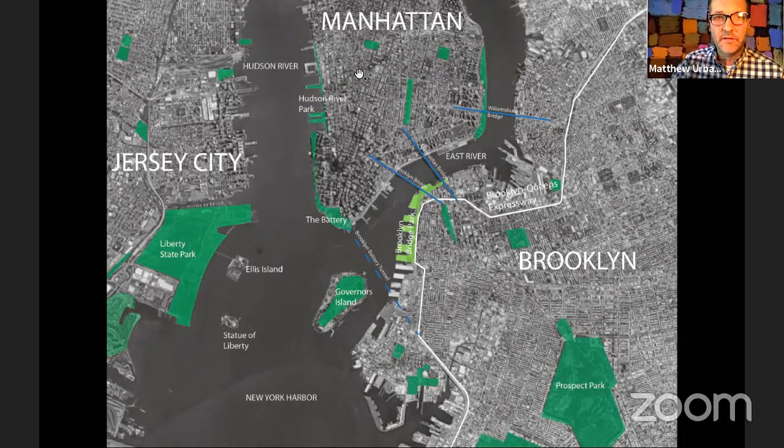Okay, so onward. For people who aren't familiar with the New York area, I probably should have zoomed out even further for context, but you probably recognize Manhattan and Brooklyn here. We can see the East River coming down through here, the Hudson River coming through here, the East River coming in here. We've got the Statue of Liberty here. We have the Brooklyn Bridge crossing here, and the Manhattan Bridge, made a little while later, crossing right there. That will help situate where we are, which is the light green—a waterfront edge park with great views of lower Manhattan and deep into the harbor and to the Statue of Liberty, with its namesake bridge crossing over it.

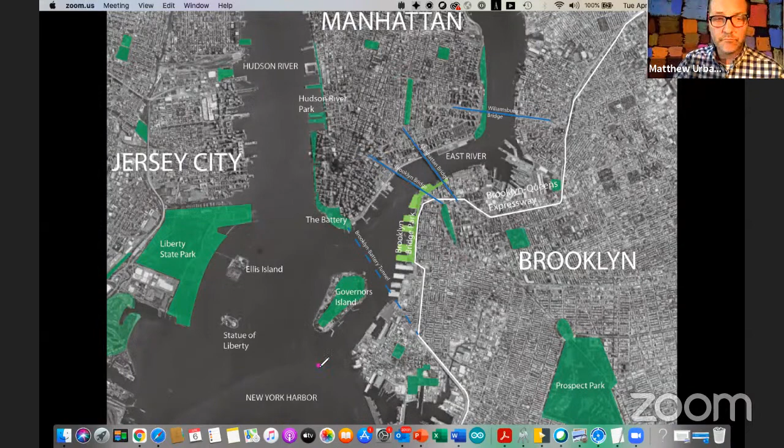Gosh, I gotta figure out how to get this in.

Also defining it against the back edge there, that tiered structure you see is called the Brooklyn Queens Expressway, or the BQE, and that's a kind of tiered highway which was made in a really cutting edge way at the time when it was made.

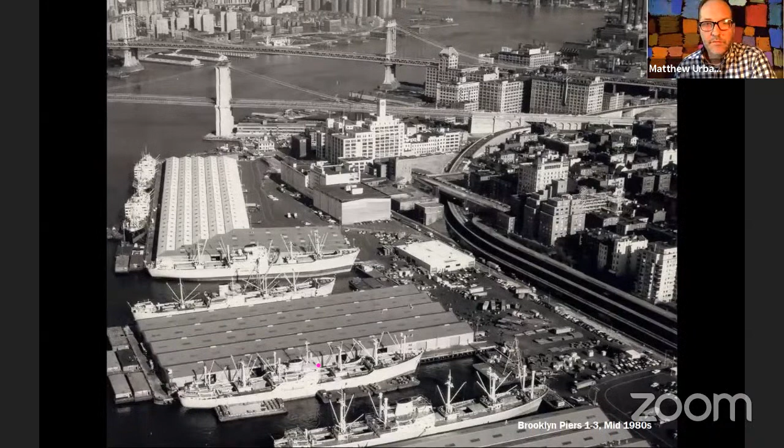A little bit earlier, the very end of the shipping that was happening on the site here, this is something called break bulk shipping. Basically, the boats have the cranes on them and everything is loose. It's sort of like if you've ever seen the movie On the Waterfront, the kind of very dangerous job of unloading these ships and swinging packages off or swinging them on, and they would hand pack them into the hulls.

And there was a lot of graft and corruption because nothing was really secured. It was tough work because there would be too much work and then no work for months. It really drove the whole economy, the whole manufacturing economy of New York at the time, though. But watch On the Waterfront. I always found it so unnerving as a kid that I couldn't even stand it at times. But anyway, it's a great movie.

So the funny thing, the irony here, was what they did with this waterfront is they made these big wide piers with sheds on them for storage. What they did is they made a kind of cutting edge break bulk shipping terminal, which is crazy. It's sort of like a cutting edge steam powered car or something like that. It was sort of like they really spent a lot of money on the old technology.

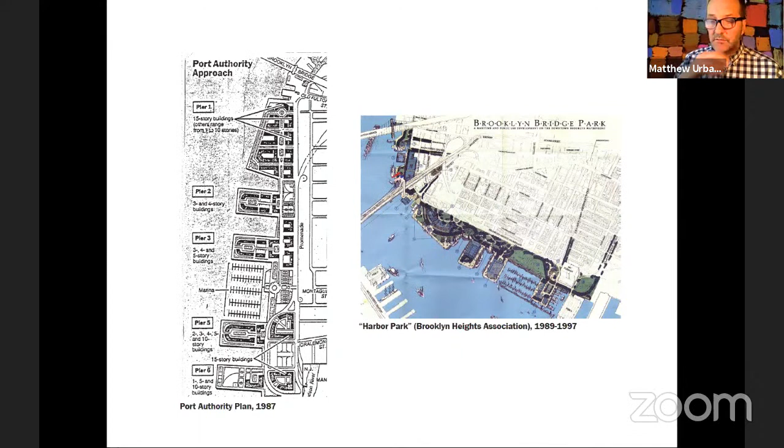To develop a plan that would be largely a park, but would plan on using 20% of the area to dedicate towards some kind of revenue generating use that would then be used to support the operations and maintenance of the park. So it would officially become a park, but it wouldn't be on the maintenance rolls, and it wouldn't drain money out of other parks.

This is a really important thing because it allows this park ultimately to be developed in such a way that it's not always a political football being played against the other parks in terms of the money being divided up for maintenance and things like that.

I came to appreciate the wisdom of this more and more as I've worked in more circumstances where people want to make extraordinary parks. If you say you want to make an extraordinary park, savvy people will understand that might mean it will drain money from other parks. So that's a very smart thing that they did, to figure out a way to pay for it independently.

So we worked on an early plan with a whole team of people that was really driven by financial planners to help solidify that idea.

In 2003, we won the competition, and we were very much a sub-consultant on that first plan. Then we won this massive contract that was absolutely remarkable. It was written by one of the guys in the ESDC at the Brooklyn Bridge Park Development Corporation, and it basically said that we were to master plan a park.

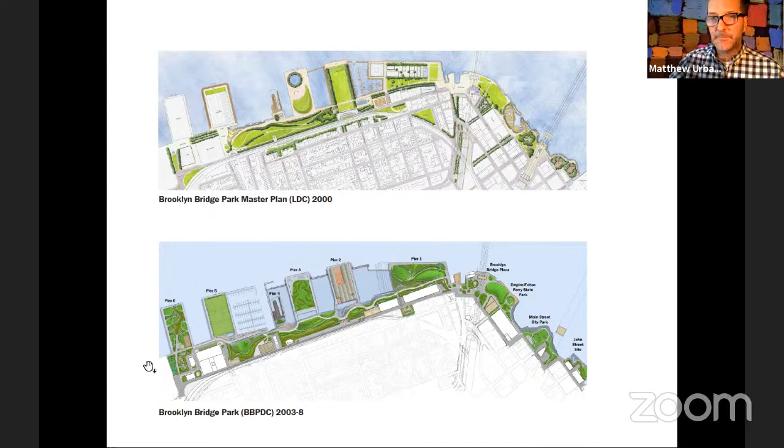We were to master plan a park within an urban plan that we were also to master plan. Within that urban plan, we were to identify revenue generating sites and uses, develop a design, calculate the cost of annual maintenance, and balance revenue generation with maintenance costs. Then we were to present it all back to them in public, which we did. You could imagine there would be a few issues with that, but it was great. It was worth it.

One of the challenges we had, if you learn about public park making and restoring in New York City, you'll learn about the Central Park Conservancy, which was put together to rescue Central Park, then in complete ruin—bare dirt, broken glass, a mess by the late 70s. They started in 1980, and by 1986 Betsy Barlow Rogers, who was running the Conservancy, had already written a book on it.

But no one really understood what it meant to make a big park in New York, or the possibility of landscape. So we did a lot of public outreach, trying to talk to people about what landscape is as a program, what a park is as a program, and trying to get people to understand that landscape isn't just decoration you put in—which is what people thought, because they were more used to commercial development.

So we were kind of desperate to develop a language to talk about park making in landscapes and how different landscapes had different uses. We came up with this type language—a landscape type is a landscape that has a use, and it might have many different manifestations.

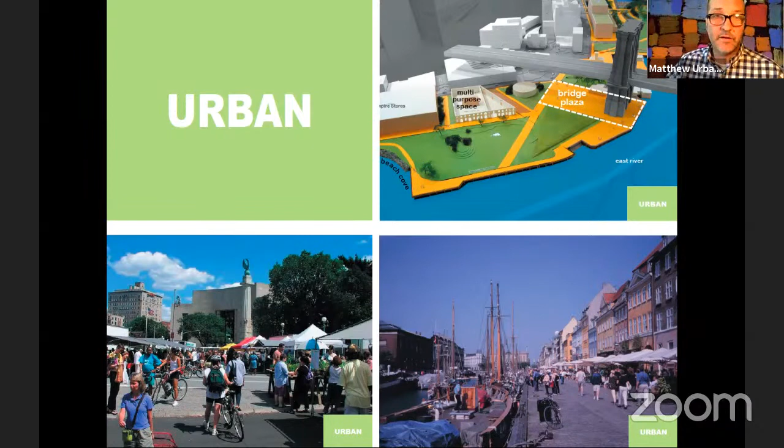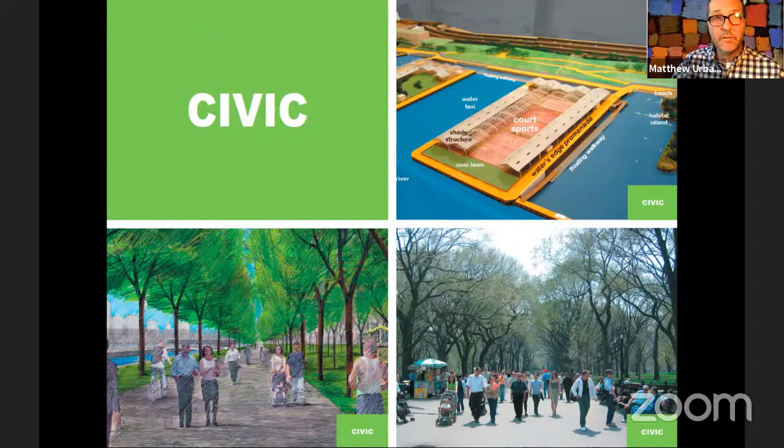One type we were desperate to come up with didn't have a name yet. I remember flying—we were in Boston at the time—down to New York with all these slides, because we used real slides in those days. How were we going to convey the idea of a boundless, capacious space, a space that isn't about any one thing, but about a kind of limitless capacity of landscape?

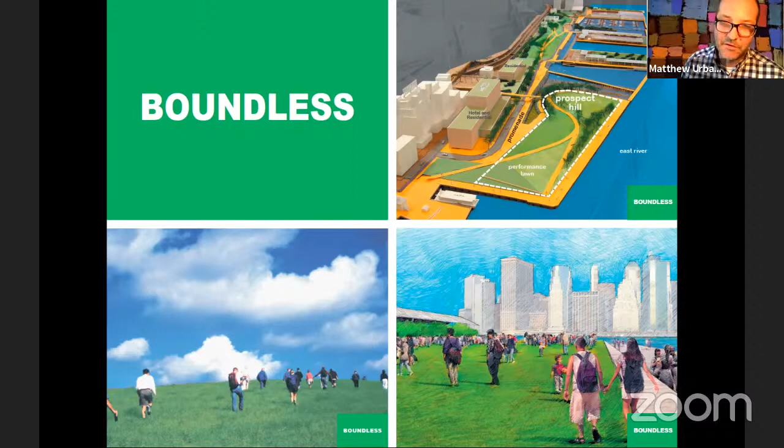Michael Van Valkenburgh leans over to me from the seat in front on the plane and says, 'How about boundless landscape?' I said, 'Okay, cool, we'll call it the boundless landscape.' So that's become one of our types that we continue to use.

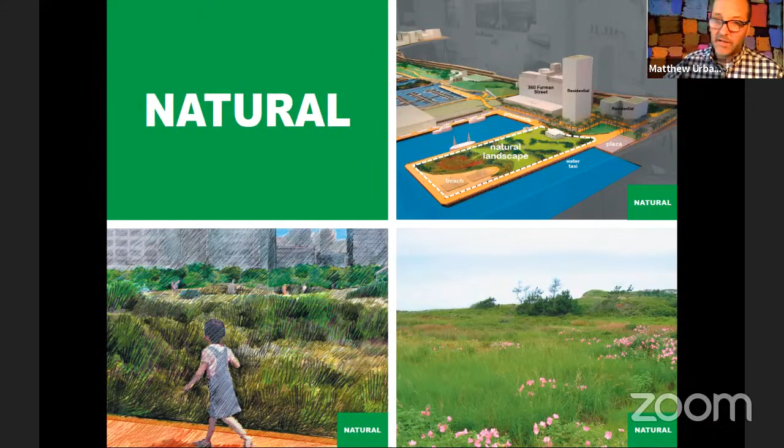And then, of course, there's the natural. So we had these four types: the urban, the civic, the boundless, and the natural. This was us developing a language to talk about landscape to the public—we really treated the public like they wanted to engage with this stuff on a high level, and I think this is a good example of that.

The site was also very complicated, and it needed strategies to keep it doable, and to explain those ideas to the public. So we developed concepts, and came up with these kind of wonky names for them.

Honestly, you've got to forgive me. It was 20 years ago, and I guess I would maybe do something slightly more populist in my naming strategies nowadays. I was a little too academic at the time.

One of the things we called a key idea was urban junctions, because we were trying to explain this idea that there were moments in that plan that were well connected to the city, and moments that were just never going to be well connected—they were cut off by the BQE and the escarpment and things like that. So we said we needed to develop these junction points, and we came up with this name, Urban Junction—those would be the moments where things really came together.

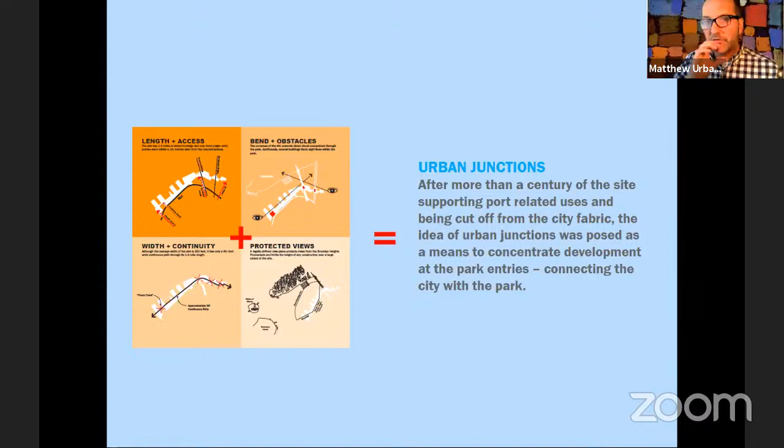And so in the plan, you could see them kind of circled here lightly. There are 4 major urban junctions, and our programming kind of laid out in such a way that—can people see my mouse moving around?

Yes, good, okay. So the programming also started to come out of the urban junction idea, where we had a great junction point here at the base of the Brooklyn Bridge, which was the historic place to go down and catch a ferry across the East River before there was a bridge. The oldest commercial building in New York City is right on that corner. Down at Atlantic Avenue was a major avenue that went back to the city. And up in the Dumbo area, under the Manhattan Bridge overpass—that's an acronym—it was more seamless in its connection to the city.

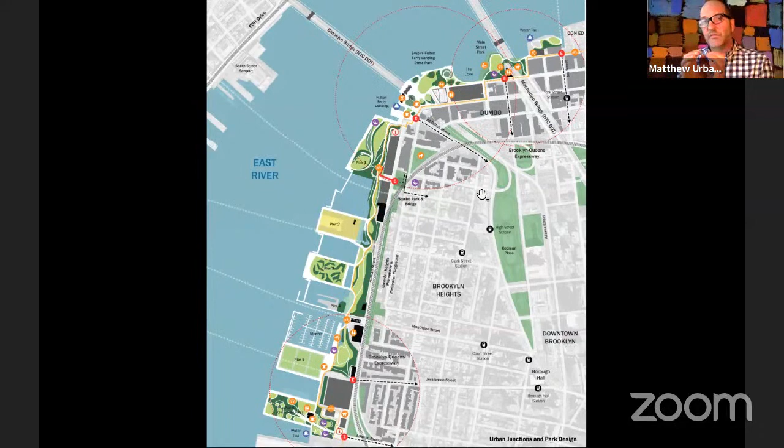So it suggested these moments of neighborhood park programming, a kind of thing you'd want to go to every day that would happen at the urban junctions. And then the things that were further away, those would be things you'd go to more of a regional park for.

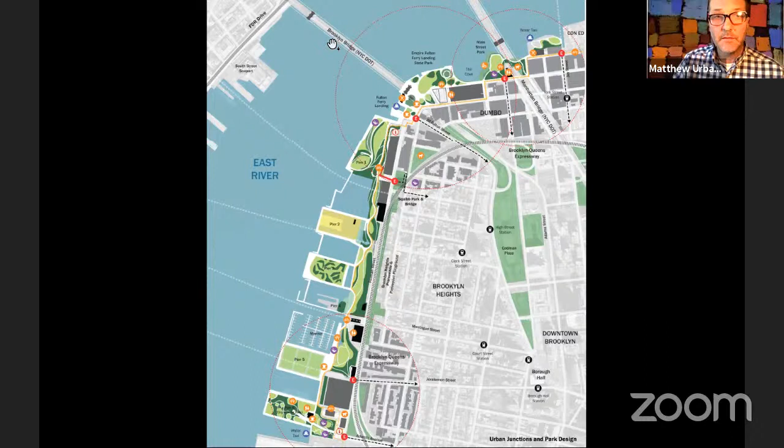Furthermore, our programming started to suggest that the piers, as they march down here—so this is Pier 6. Sorry about that. This is Pier 6 here, 5—you could see the writing on it maybe. Pier 4 was a ruin. Pier 3, Pier 2, Pier 1. And then the Dumbo area, underneath the Brooklyn Bridge right here.

But what happened with the piers is they started to be developed in a rhythm of active and passive that helped distribute those uses throughout the park. So Pier 6 is mostly passive with a little bit of active volleyball courts. Pier 5 is very active with 3 huge soccer fields, but has a little picnic area attached to it. Pier 3 is very passive with a little bit of activity on it. Pier 2 is very, very active with basketball courts, but a little bit of passive. And Pier 1 is passive again with a little bit of active. So it kind of distributed that stuff throughout, but that was originally generated by the urban junctions concept.

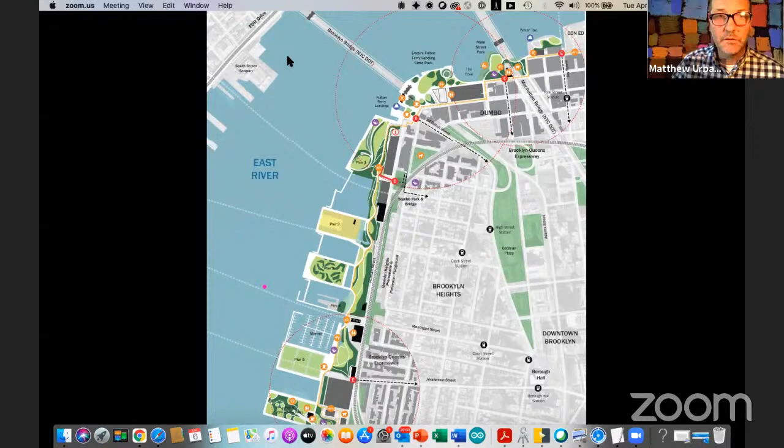So as we were trying to figure out what the best economic sustainability model was, we were learning about it ourselves. We have a legion of consultants working for us, at least 25 or 30 at different times, from financial consultants to ecologists to engineers of all types. We're leading this whole team, I think unprecedented for a landscape architect.

And what we learned was that there were types of uses that would be compatible, which was kind of common sense. A tannery wasn't compatible, a nuclear power plant we didn't want to do. But housing, for instance, was compatible because there weren't enough people living near the park, and people living near a park is a great thing, as you can see by all the successful parks in New York.

So we started to compare them all. We saw commercial—so there was some residential, hotel, medium, large retail. We looked at all those different things, and we found that the hotel, the residential, and some kinds of retail had the smallest footprint and the highest value. So those were the things we kind of zoomed in on. And then we had to explain that to the public, which we did do.

So you could see what we wound up doing in the master plan are these highlighted orange areas, as we started to designate locations for revenue generating uses. We drew spatial envelope diagrams that independent developer-architect teams would bid on through the Empire State Development Corporation and Brooklyn Bridge Park. We defined an envelope they could work within that was compatible with the plan—the type, the height—so they fit within these orange boxes, and you could see they were also at the urban junctions.

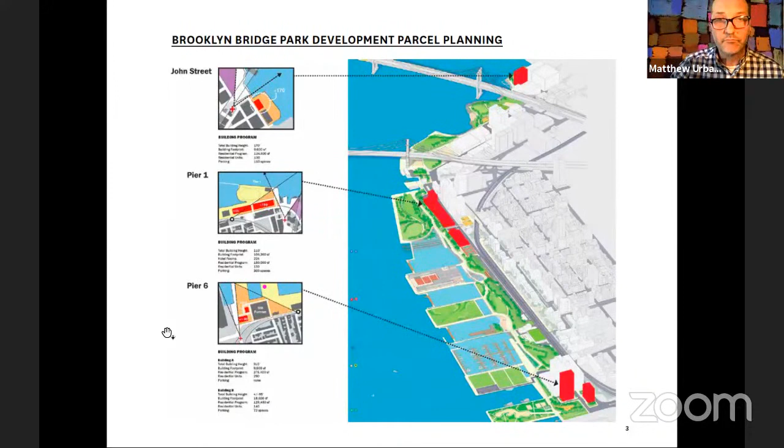So here's how we started to shape the development parcel at Pier 1, which is where we had decided there would be a hotel. It turns out it was a very good idea to do that.

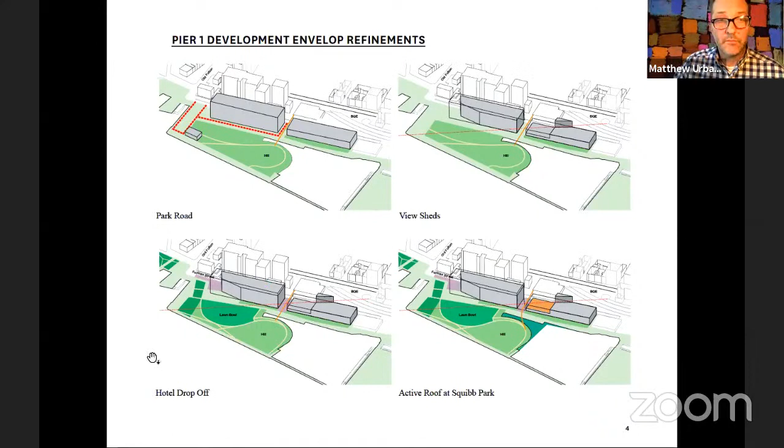So here it is actually in reality. Pier 1, which is actually not a pier, but is land—we made a hill there, I'll talk to you about that a little more. And then you can see the hotel and condo development that was put in on this land, which actually was disused buildings on the Port Authority property. You could also see...

the Fulton Ferry Landing here, so this is a historic roadway down to the bridge. We could see the Brooklyn Bridge, and this really became a key urban junction moment for us in the development of the design.

Zooming in, here is before the development was put in. One of the key things we did was we got the state to build the park before the development—that was a better way to do it.

You can see some of the moments: there's a little playground at the entrance here, there was this big inviting lawn, and other things happening right at the entrance, including some existing features that we wound up highlighting, like a little old firehouse that they sold ice cream out of, and other cool things. So this little cafe was part of what was put in there right at the entrance, with a great view of the bridge and everything.

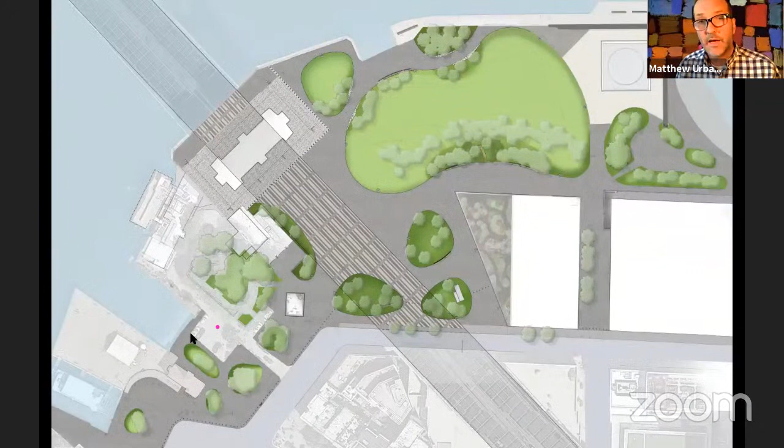Ironically, the last piece of the park being made is now the plaza that actually connects the whole park together underneath the Brooklyn Bridge. And this is the plan for that area.

The areas to the left and right of the bridge were done already, including a redevelopment of a park, a ruin here where a theater was made, a little walled garden made here, all kinds of things through here. But the last piece was the plaza, because they were restoring the Brooklyn Bridge for 10 years during the time we were building the park. They started doing it as soon as we started making the park, ironically.

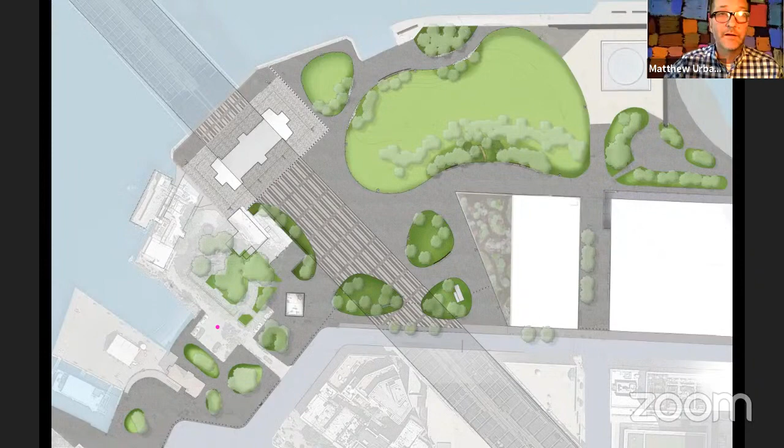We'll give it to you later. So what happens is you come in, you turn, you go all the way up a hill, and then the Statue of Liberty is at the end of that view. So you turn here and go up that Bridgeview lawn, as we call it, facing back towards the bridge.

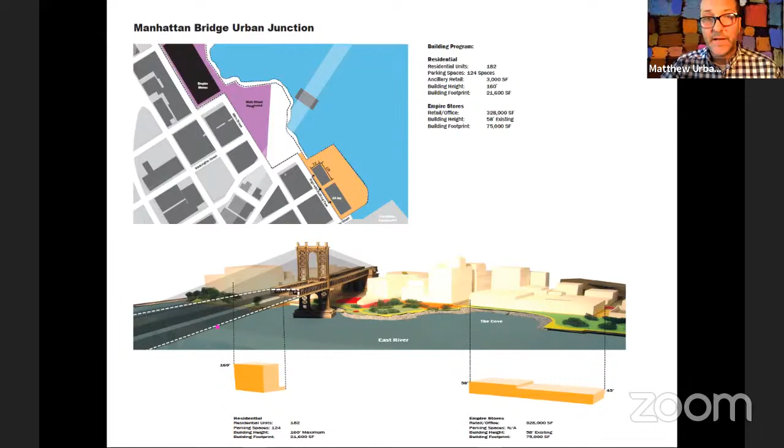Another of the urban junctions is down near the Manhattan Bridge, and there's some great viewing moments there. The Manhattan Bridge has got its own beauty—nothing compared to Brooklyn Bridge, in my opinion, but still a great bridge.

Then all the way down at the other end of the park, at the south end, is Atlantic Avenue. That was where we had some taller development, because we could be out of the way in terms of views and things like that. It's a very complicated story, but anyway, what we decided to put here was basically the biggest playground in New York.

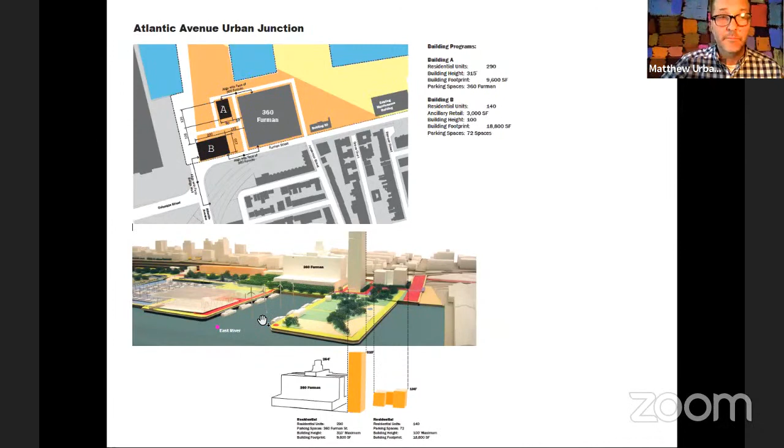It was called the Pier 6 Playground, and it also was built as an initial element here. You can see the development parcels are empty. And it was the second kind of major playground that we made.

We made one called Teardrop Park, which is a very green playground also, but we don't really call this a playground, we call it a play garden. Our concept was really in reaction to everything that we didn't like about New York City parks—playgrounds, which were very standardized and very hard and very predictable and had no nature in them at all, ironically, even though they were in parks. They sort of were defined by fences and black rubber.

And so we really wanted to kind of make play within garden rooms, and you can kind of see that concept here. That avenue going up the slide there is Atlantic Avenue. That's a major avenue that connects all the way back to JFK airport, all the way on the other side of Brooklyn and Queens, if you walked that way.

We put other things at urban junctions, like transit connections. So the harbor ferries came in at the urban junctions—that was another thing that we put in there. This kind of gives you a sense of that kind of play within a landscape.

We also went all over the world looking for new types of play experiences and equipment that we could use. We brought in things from Europe and from Germany mostly. We made something that was on the cover of Time Out magazine, I have to brag, and voted the best playground in New York City. So that's kind of cool—I like it when you get the populist appreciation like that.

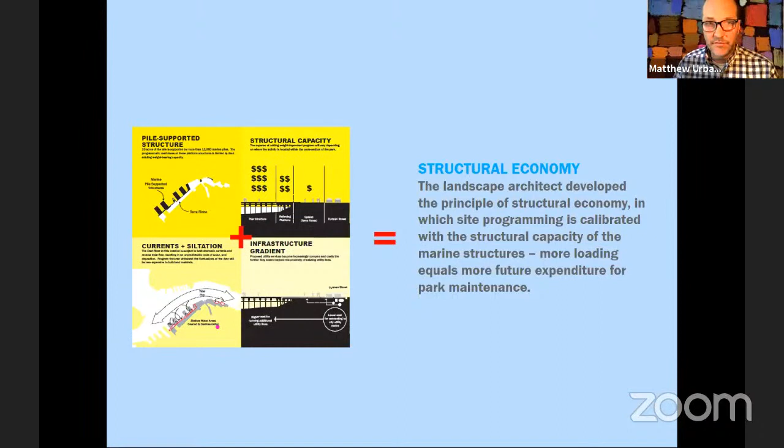Another concept that we put out through the planning was this idea of structural economy—that we had to work with the site as it was in terms of its base structure, and we couldn't come up with ideas that didn't work with the capacities that the site had as an artifact. These piers had a limited capacity, but they were great opportunities for large flat expanses. The upland had much more weight-bearing capacity and was closer to utilities, so we could do mountains and long-term tree growth up on that side, if you look at the two different sides of the park in cross-section.

One of the things that really grounded that was this kind of structural analysis that we did before we did any planning—we called this the stoplight plan. The only thing we wanted to change about the original contract is they wanted us to do this structural analysis at the end of the design development phase. I was the big proponent to say, no, I think we better do all of the structural analysis of the site before we have any ideas. That will inform my ideas instead of getting dumb ideas, or getting good ideas that then turn out to be dumb because they're not as well suited to the site we wanted to put them on.

So marine divers—most of these people are actually ex-Navy SEALs. They are very specialized construction people, and they dive underwater and analyze structures underwater. They do seem like superhuman people when you see them—they're like all 7 feet tall.

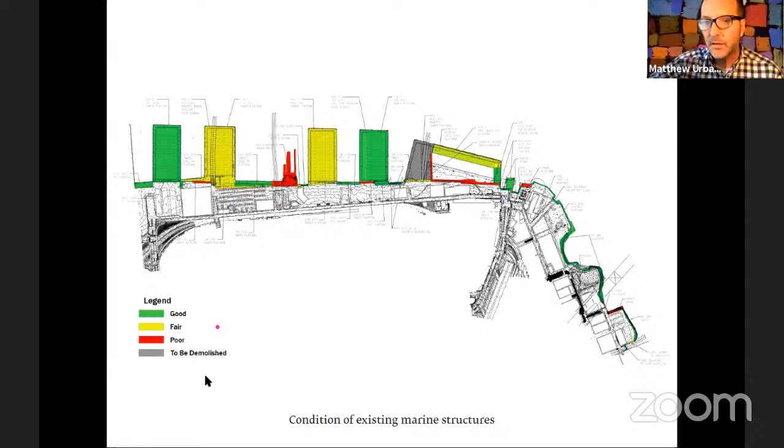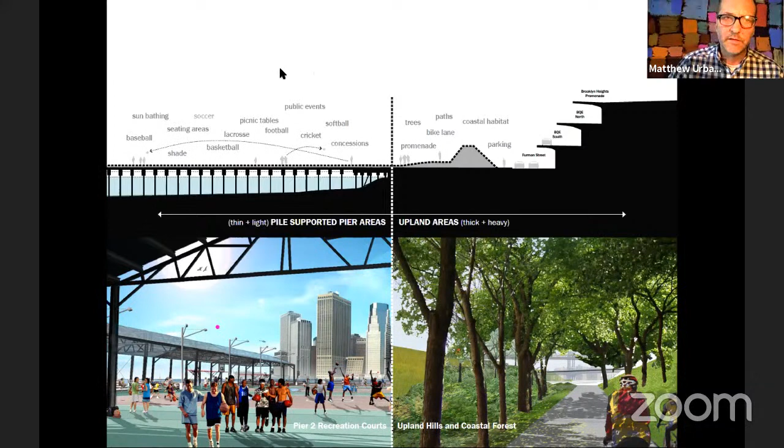We also did analysis of all the surrounding areas, and using the piers for large-scale recreation was supported by the fact that there was very little large-scale recreation in the immediate area. All the parks were small or ornamental, with only a few amenities. McLaughlin Park was the best of that kind, but it was pretty small. So it really demonstrated a need for these kind of expansive, larger scale recreation.

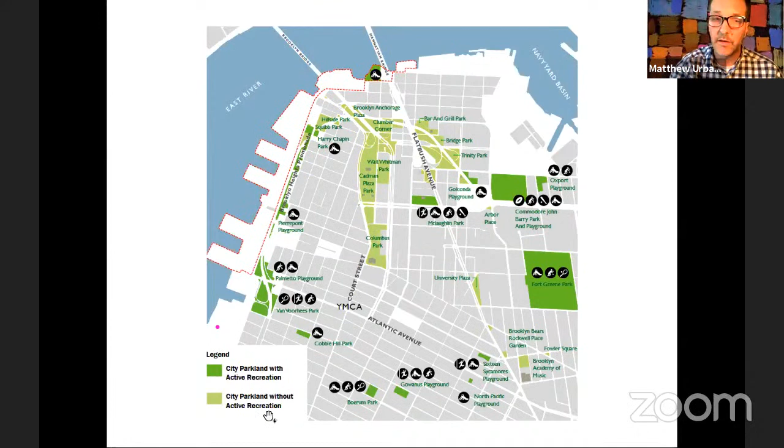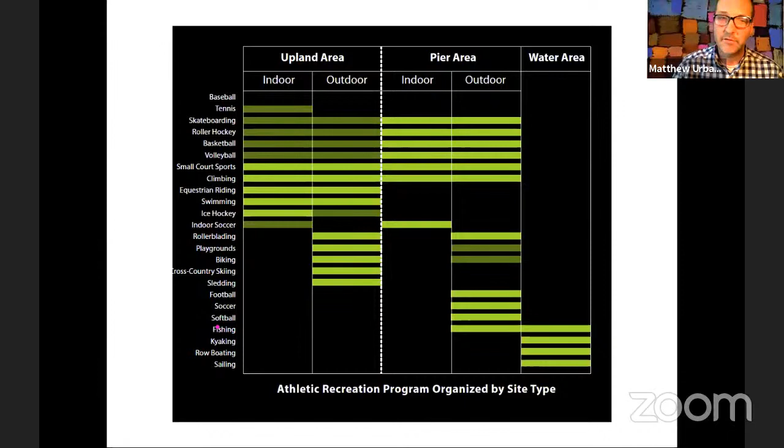We did an analysis of what the different capacities were for different types of things, and started to present the data back to the public, showing how we made decisions. This is the built version of the early diagram — this is our Pier 2, which I call the basketball palace, and some upland pathways up in the upland area of Pier 5.

These are just some examples of the two types of landscape that came out of the structural economy analysis. For soccer, we could fit 3 full-size soccer fields on Pier 5. We recycled the building's edges and used the frames to support lights around the edges, keeping the essence of this post-industrial landscape, which people were very interested in.

Picnic Peninsula is a lightweight element — much more wonderful than just a massive number of picnic tables — right on the waterfront for public use, with grills so people could come and grill.

Like I showed you already, the Pier 2 structure — we retained the roof and worked with Maryann Thompson to make a kind of gigantic shade structure. On the uplands we have this wonderful feature we call the Vale, where you go up a 30-foot high hill that we made, along with vegetated pathways moving up and down through the landscape. So you really get both types of things.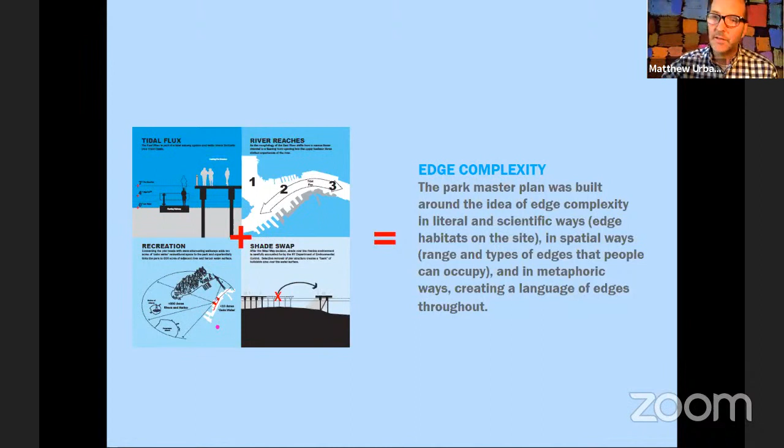So this concept of edge complexity — we knew we wanted to vary it. The waterfront was very, very consistently engineered. It had something called relieving platforms, which from above look like retaining walls, but they're an elaborate form of structuring the edge in a straight line that is pile supported. And then there are these pile supported piers.

We knew some of them were in poor condition from the stoplight plan that the marine engineers had done for us. So we started using those hot spots within the plan to guide where we could get rid of things and where we could change things to start adding variety.

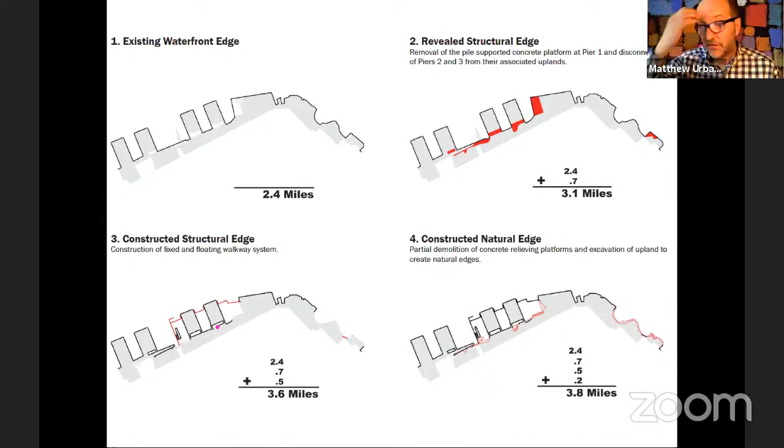In this case, we were just trying to suggest that more length of edge suggested more of a good asset, because edges are good on a waterfront. So if you go from 2.4 miles of edge to eventually 3.8 miles by cutting into the edges in places and creating more edge, you're actually increasing the asset, and also getting rid of things that were hard to maintain.

We started to talk about a variety of types of edges, again from the planning. This is a relieving platform on the upper left — that's sort of what a lot of the shoreline already was. But then we talked about how we could make other types of edges that would create different kinds of transitions and connections for people and the landscape to the water.

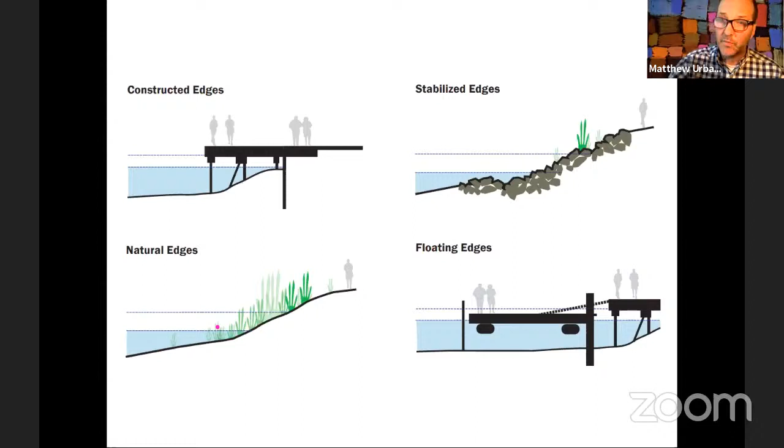For instance, inland of Pier 2, we dug out and made something we call the Tidal Pool, a landscape that registers the change of the tide visually, which you can never see with all the vertical edges. It's a bit earth-art inspired — a big spiral of stone that becomes a way to see the registration of the tide, which is 5 feet in New York City.

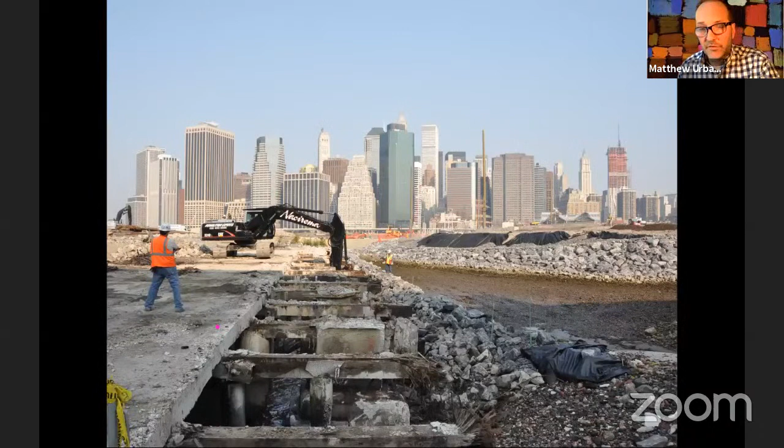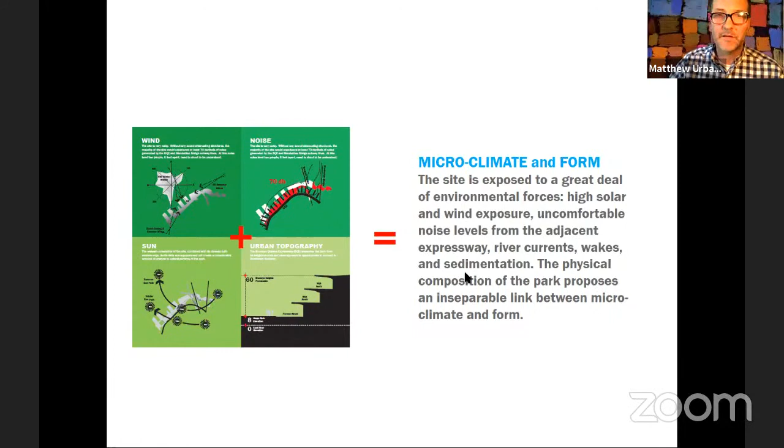That was a great way to learn about the wind patterns on the East River and realize how crazy they were. There were days when I'd ride over the bridge, and on the Brooklyn Bridge towers there's a statue of an American flag on each one, a giant flag in the middle. I could ride across and the flag on one tower would be blowing in one direction and on the other tower in the opposite direction. Not kidding. Or the flag could be straight out on one tower and just hanging limp on the other. Just weird, crazy wind patterns. So it was really good to learn about these things by riding over the site every day.

Then we have the BQE, and despite the fact that the Promenade is an almost sublime experience, the BQE was designed to throw its noise away from the urban development of Brooklyn Heights. You can see by the shell shape of the cantilevers that it really projected all of the traffic noise. The traffic jam was actually good because the noise level was lower, but it projects the noise out over the future park site. So we needed to do something about that.

We needed to basically get a master's class in sound engineering. So we hired acoustical engineers who actually designed concert halls, and we did some really interesting things to start to learn how to mitigate that sound.

What we ultimately did is shown here — not a wall, a wall would actually have made it worse in certain ways, but I'll explain how this works. One of the opportunities of making this pointed landscape at the back edge of the park, which we called the Mohawk, tongue in cheek in the office, is that it created a wildscape on the back — people wanted a wild part of Brooklyn Bridge Park without people in it. Not an easy thing to do in New York, since mostly everyone else wants to use every square inch of a park. But this wildscape on the back could be like a bird sanctuary.

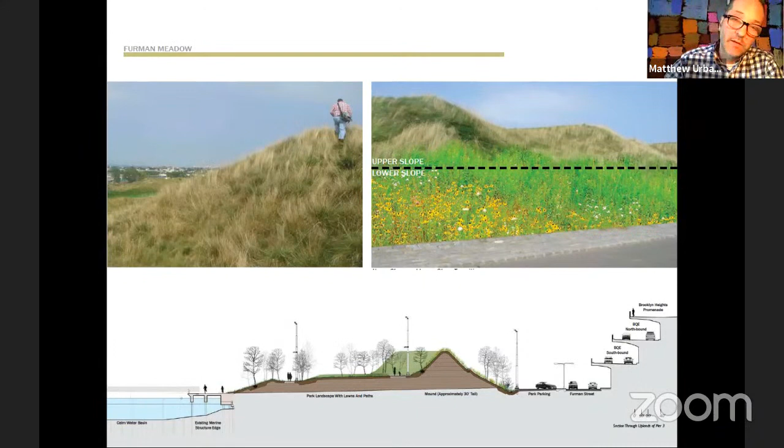The other thing that was neat, shown in this early rendering of the beach with the guy in the kayak in the foreground, is that it would visually lift your eye and reconnect the escarpment up to Brooklyn Heights again. And it does do this — it reconnects and makes a giant ha-ha, so you can't see the Brooklyn Queens Expressway anymore from certain angles when you're closer in, which is where the problem was in terms of sound.

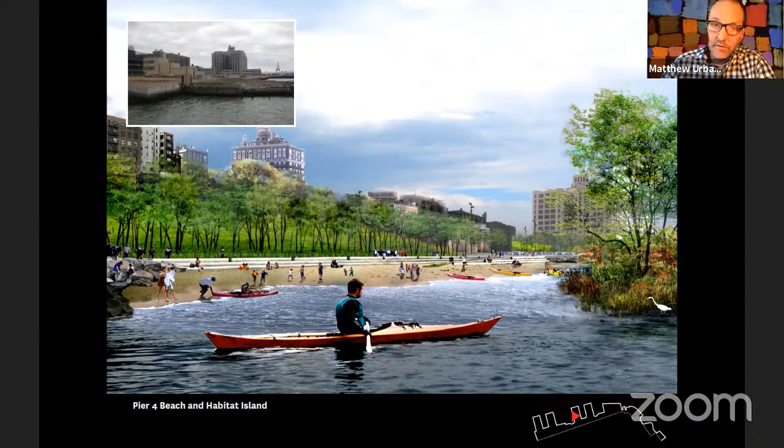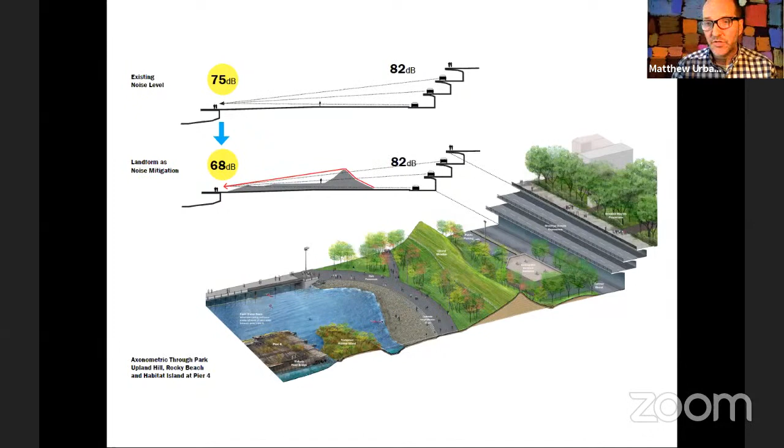What we learned from the sound engineers is that high frequency sound, the sound you could mitigate, travels in a line of sight. So if you block the visual connection to the sound source — the tires on the pavement, the sound reflecting off the ceiling, and the engine noise — you can reduce the sound. The longer you make that path, the more it's mathematically correlated to the decibel reduction you get. You could put that into a computer and it calculates the sound reduction based on how much of a break you make in the visual path to the source.

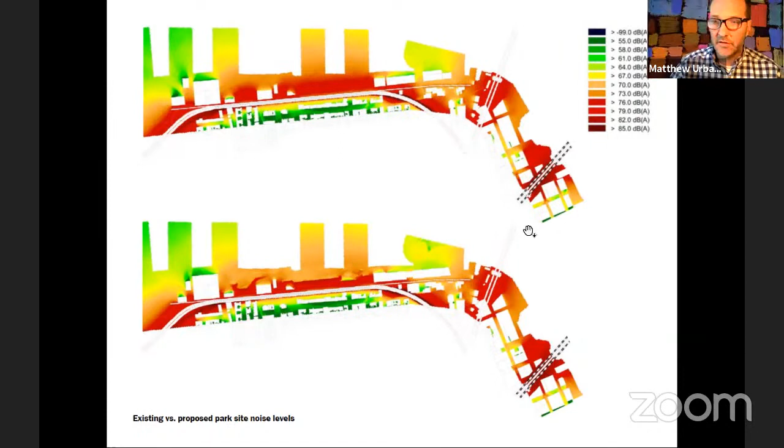So we made sound topography maps where they measured the sound on the site, then built a 3D model, which was more advanced than was common at the time. We'd put different things into the model and see what they did to the sound contours. What we were trying to do was get rid of the red where we could, bringing the sound level that existed out in the middle of the piers — which seemed tolerable — into the upland area. That's what we were able to do: we got a 7 decibel sound reduction, and since decibels are logarithmic, that's actually a very significant reduction.

It involved a lot of high-tech geotechnical construction techniques that I don't have time to explain, but you don't normally make one-to-one slopes very easily.

It gives very distinctive form to the park, and it really works too. It actually works a little bit better than the model predicted. Certainly in some places, it's almost eerily quiet when you get up tight against the sound mitigating landscape.

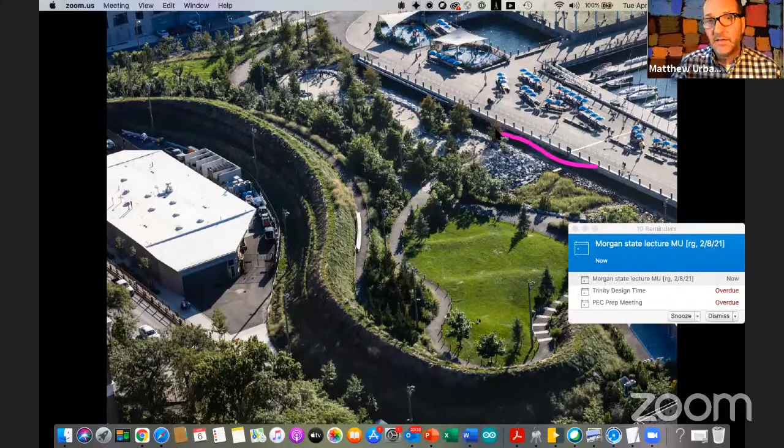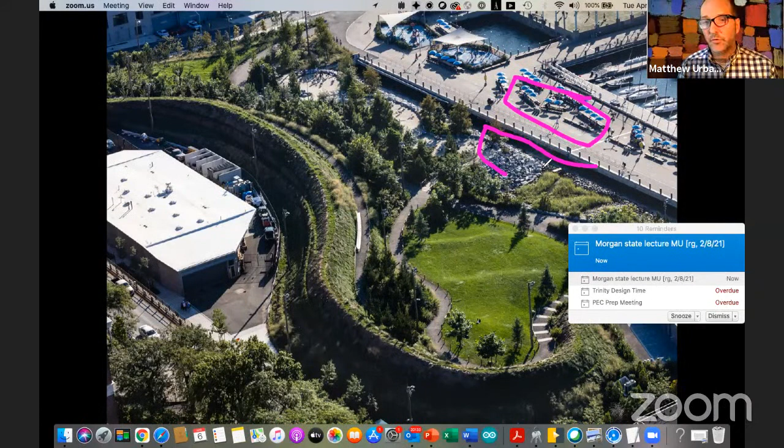This is at the head of Pier 5. You could also see in this picture a place where we cut away behind an existing bulkhead, so that the Picnic Peninsula was on a bulkhead supported by steel piles and was sound. But the older waterfront inboard—since they built the waterfronts out incrementally—was wooden and rotting out.

There were sinkholes in the landscape. So we decided to demolish the old landscape but keep the newer one, and made a place where the water actually comes underneath you. The waves come underneath you, and there's a shoreline we created behind the shoreline. It's a really interesting solution that comes out of the particularities—the archaeological artifacts we had working here.

The analogy I make is to Olmsted working in Central Park. What did he have? He had poorly drained areas, rocky outcrops that were tough to develop, and disused areas. He turned the poorly drained areas into the great water features of Central Park by augmenting them. He exposed the rock outcrops and made them into dramatic features. He worked with the intrinsic geological base of what he had—he didn't rearrange it, he worked with it.

Here we couldn't rearrange it either. We needed to work with it. In this case, our geology is our urban archaeology. We exposed it just like he was exposing natural elements there.

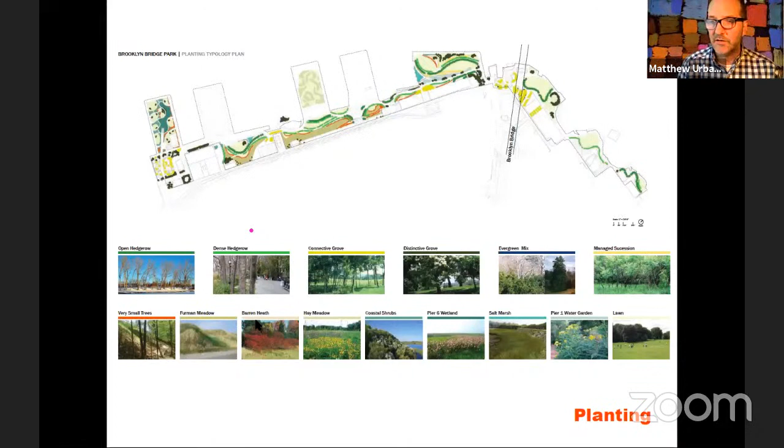So we went to truly natural barrier beach landscapes that were nearby. One is a national park called Sandy Hook in New Jersey, just right across the harbor. And then we also looked at all the urban landscapes that do exist, both in terms of weeds and overgrown stuff that volunteered, as well as design landscapes. We made a whole compendium based on that empirical evidence.

We became obsessed with the landscape as it developed over time, because we knew it had to look good in the beginning, and then we knew it needed to work as, you know, the craziest thing about trees is they just change size so much. I mean, architects, they're all worried about inches and centimeters, and meanwhile, one of our major design elements starts out like the size of a person and ends up the size of a 10-story building. It's just crazy how much they change in size.

And of course, you're going to have attrition, you're going to have loss over time. And we started to think about, well, could we put a lot of trees in and have a planned attrition, where we actually even design in removal, or allowing trees to become fewer as they change in scale and size over time. And so that was captured in this kind of time lapse of the same piece of a hedgerow.

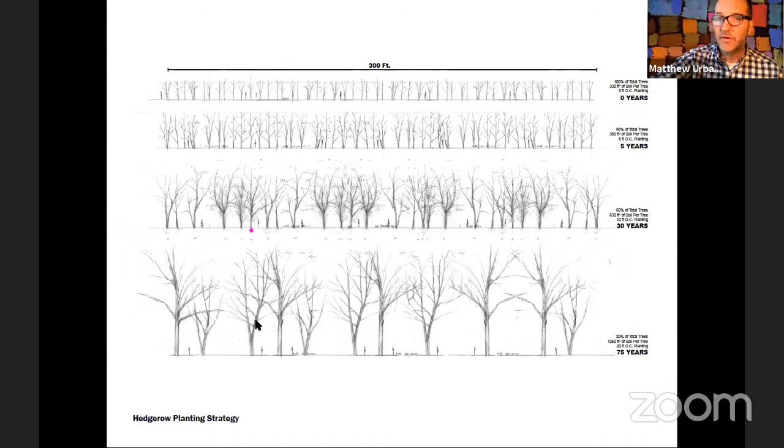Because one of our key types that we came up with was this idea of hedgerows, and we started to develop different types of hedgerows. One of the key ideas was lining the paths with lines of trees, sometimes open - we call that the open hedgerow - sometimes dense on the bottom, which we called the dense hedgerow. Really fancy names there.

And what that allowed us to do was create these shaded corridors that move through the park as soon as possible within the growth time of the tree, but then also maintain open lawn spaces, because the park land itself was not that much. We only had about 72 acres of land. Central Park is 840 acres, for instance.

But the borrowed landscape was huge, bigger than anything. And so if we could make big open spaces, or relatively big open spaces that connected to the borrowed landscape of the harbor, we could connect to that. Sorry, trying to figure out how to advance my slide. And then by not putting trees in these lawns, we would never block the view.

Also, with the use of lawns in public spaces in New York, the lawns would have all the sun they needed to be quite healthy, and we wanted the park to be organically maintained, which it is. And if you scatter trees on lawns, you basically are creating a lot of competition for the grass in terms of light. And if there's two things New Yorkers like to do, they like to sit in the sun because they never get to do that, especially on clean grass.

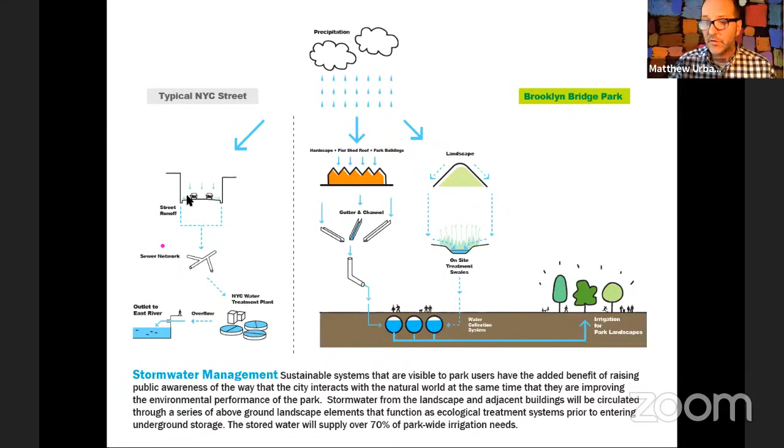And then I'm going to try to end up here with two short sections, on the reuse of materials in the park. We had a whole rainwater collection program where we were collecting and storing rainwater to reuse as irrigation water, with these underground pipe galleries that we were putting in.

And we used water gardens as a kind of expression of our stormwater recycling and filtering system. Really, to me, they were just a great excuse to make wonderful water gardens, but they also did have an infrastructural use. So this is actually quite early pictures of those water gardens.

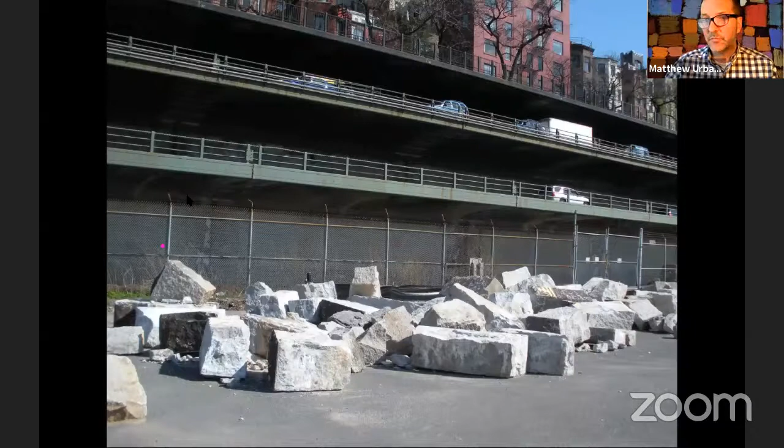We also, through our connections with the Parks Department and other city agencies, found that there were big demolition projects going on through the city, and we were able to get materials incorporated into the design. I remember getting a call from Joshua Laird, head of the planning division of the New York City Parks Department, who had a connection in the DOT. He said they were taking down the Roosevelt Island Bridge, which was covered with this granite veneer, and they needed to get rid of it—what did I think?

I said, send it to the site. He said, what are you going to do with it? I said, I don't have any idea, but send it to the site, we'll figure it out. We wound up milling the leading edge of it and creating this giant civic staircase that's sort of a performance space. We call it the Granite Prospect. My little conceit was that people would think it was some ancient stair that we built the park around.

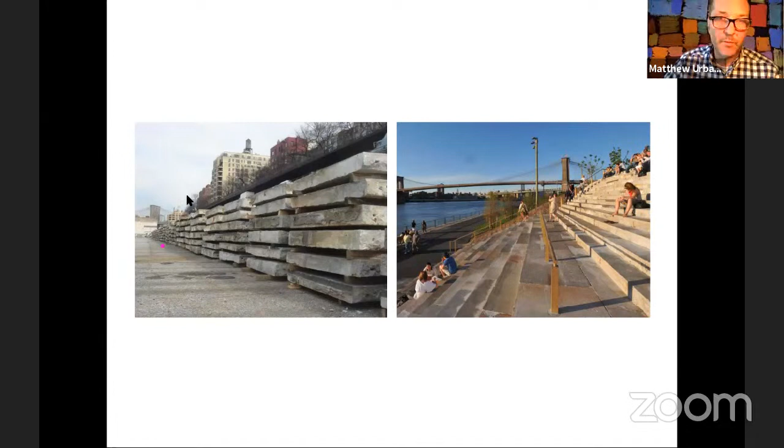And twelve years after the park was done, I was giving a tour to a group from Texas, and a lady said, it's so neat that there was this old stair here that you worked around. So the little trick worked. And this is it.

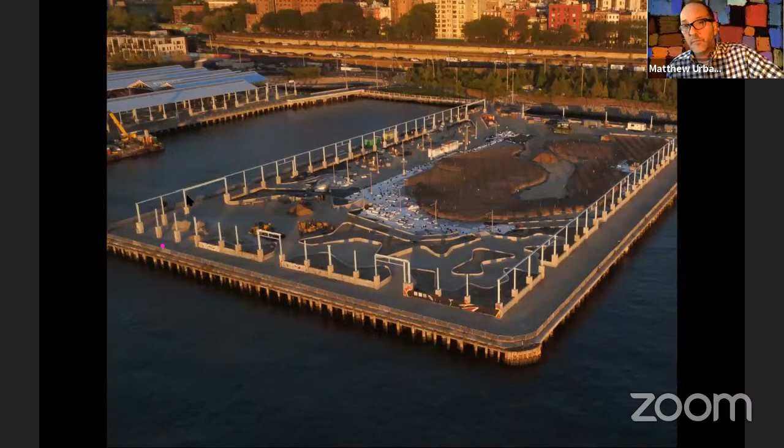It gives this great view out towards the Statue of Liberty and Lower Manhattan, and it's actually called a place of public assembly according to the New York City Building Code—I could explain more about that. But anyway, finally, Pier 3 is one of the last pieces we made, the furthest from either of the entrances at Atlantic Avenue and Fulton Ferry Landing.

We had learned a lot about lightweight landscape construction through various projects, including Maggie Daley Park in Chicago, which is all on structure. And we decided to bring a little bit more of a robust green landscape onto this pier using lightweight techniques.

So there's a big informal lawn, not for playing soccer on, but with lots of little coves for great prospect and refuge all around the edges. There's a big hard paved space for art installations, programming, and fundraisers on the corner, and a more complex garden with lots of picnic tables.

And running along the left side of the picture is this next stage play garden, which we call the Discovery Garden. It doesn't really have any play equipment proper in it, but has lots of fun objects—some found, some designed to be engaging landscape elements.

So this is just some views of Pier 3, which was pretty much an instant landscape when we made it. We used these boat mooring cleats to create this kind of surreal landscape. Very informally, kids play on them, but it's not play equipment—kids just love to do that.

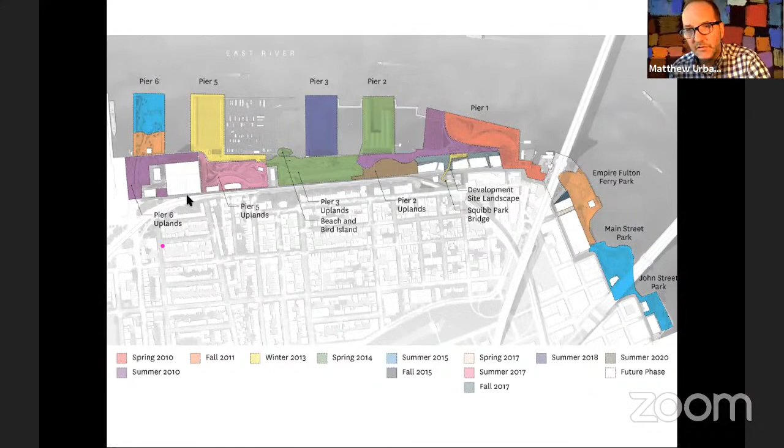So this is a view from the Granite Prospect, showing the before and the phasing of the project. The project was phased, and there was great benefit to phasing it because we got to have another ribbon cutting every couple of years, which is always fun for the politicians who come and take credit for everything.

And after. So with that, I could take questions if I left any time for them.